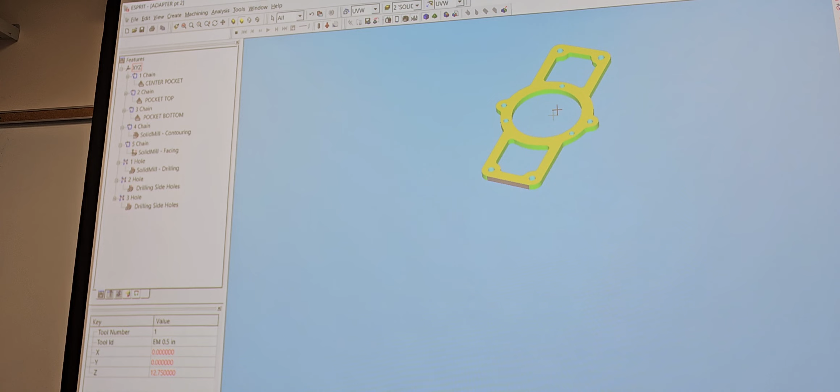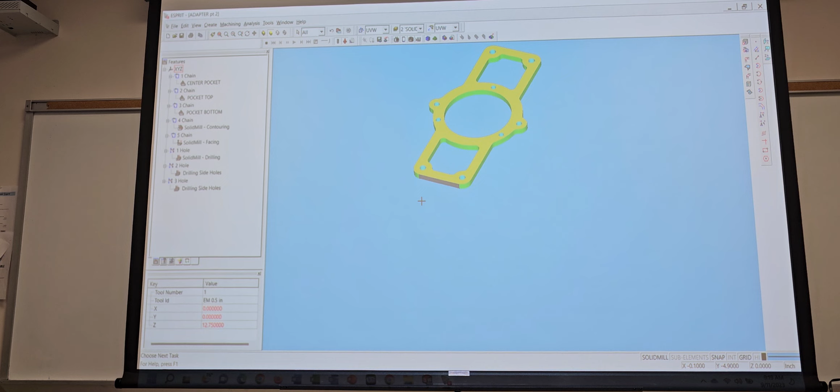Size, it might be over at least 10 or 20 thousandths, right? We gotta clean that face up, because a surface that hasn't been machined is not a complete part, right? Because if you have a saw cut here and it's lower, and over here it's higher, and your overall length from here to here is higher, and here to here is lower, well, we got a problem, right? So we have to make sure that it actually goes to that tool path.

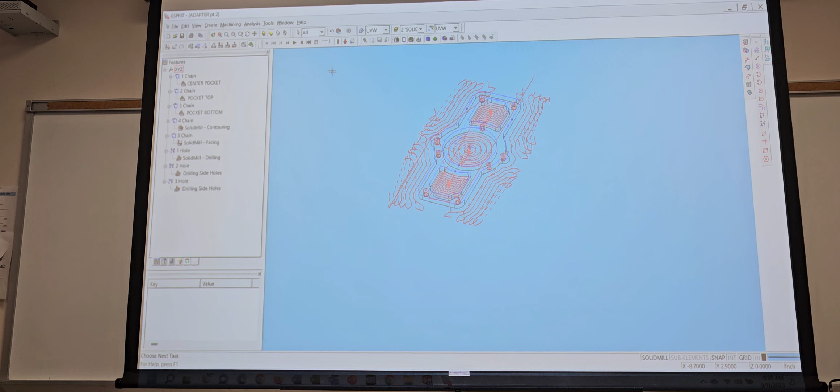And I know a few of you guys had this issue over the weekend. So, like we said, we gotta go to our solid, our material, right? So the material is, wait, first of all, where are your lines at? Which one? The X and Y. Your center ones, yeah, your axes. So we have our center there, but where are the actual lines? Oh, I forgot how to put that on there. Where is it?

Oh well. But we know from here down here, it's half of whatever this overall length is, right? So the overall length, according to the print, is 7.26, right? We got the number right there. So we're gonna go back to our stock, and let's say we make it 7.5. So we gotta come to our starting Y and our negative. So I'm gonna just go to my calculator, 7.5 divided by 2.

It's Monday, so I don't want to do math.

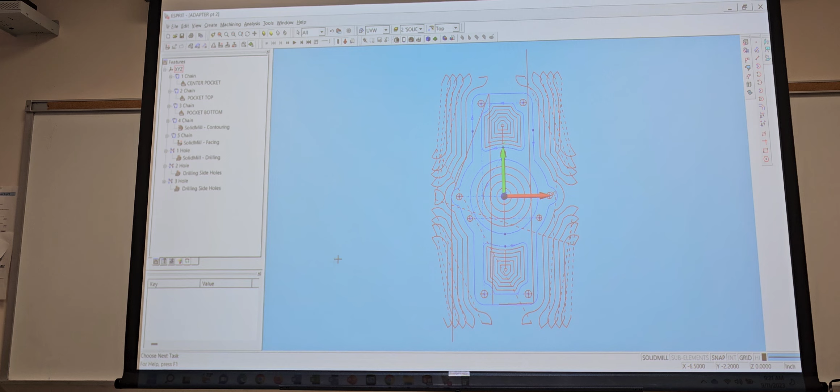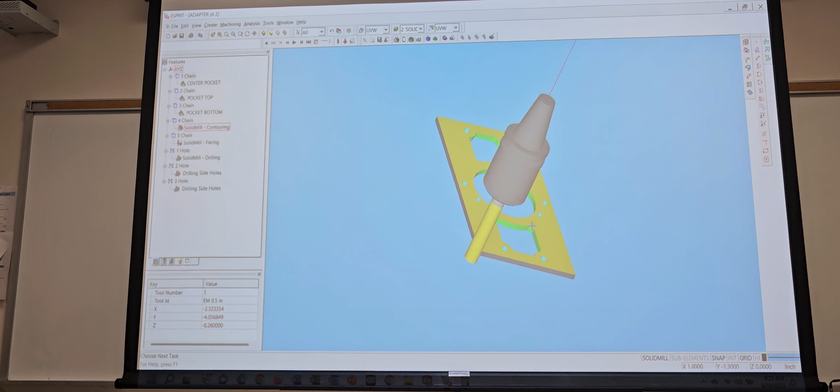3.75, right? So now this is going to go down to negative 3.75. We're going to hit update, hit OK. Now, just like on Bill's, it didn't register it at first, right? So what I told him was we can make a contouring just as a finish on the outside, and then make a rougher, and then make a finisher. As soon as we did that, the computer registered it and said, oh yeah, we are missing that. Now it's hitting it more, but it's not facing it the whole way, right?

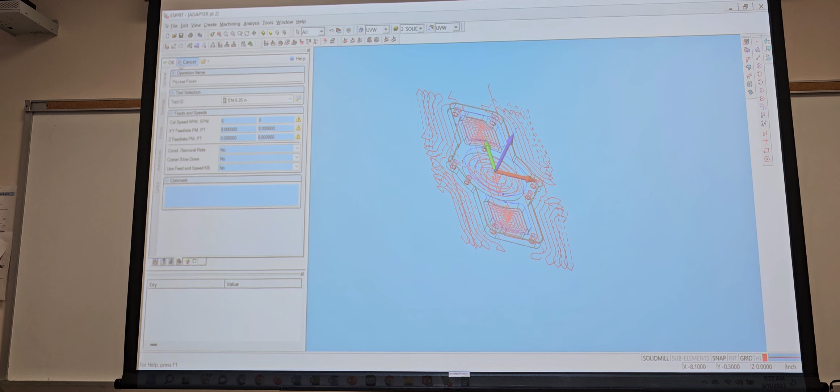I guess the only other way would be to do a new profile chain, right? You could do that too. Yeah, you could do that also, but let's say this one, we went to the contouring, and you see how it's thinking and generating? So we just made it a finish pass, and we said no stock allowance. And we hit okay. I don't have a tool. Let's just say 0.25 inch. Now you guys see how it's making that? What are those lines? This is entry, exit.

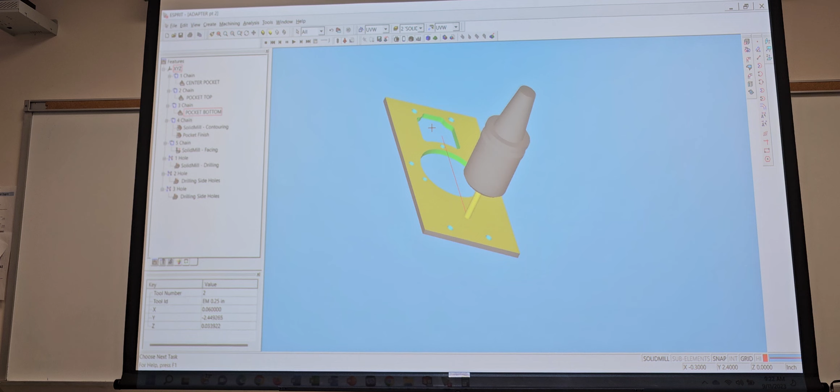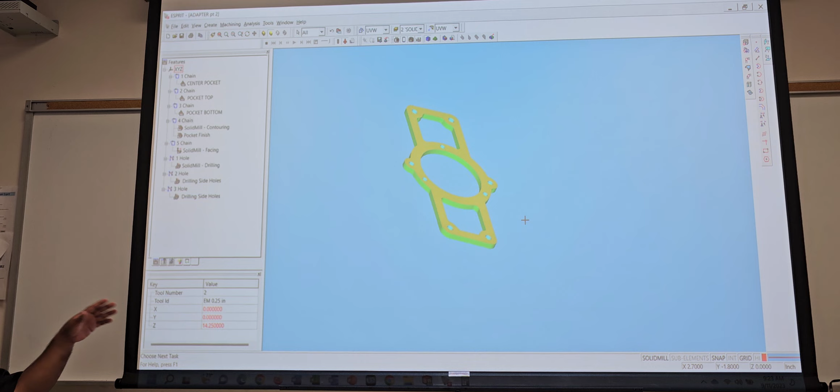Very nice. Ta-da. Now we clean it up, right? So there's multiple ways of doing it, guys, but normally when you're machining this in real life, you want a rougher, especially if that tolerance is going to be really tight. If this tolerance from here to here is 7.260, let's say plus 5 minus 0, you want to rough it out first, right?

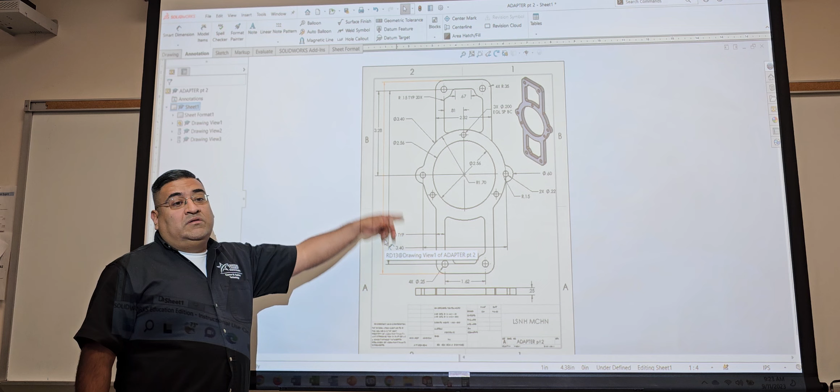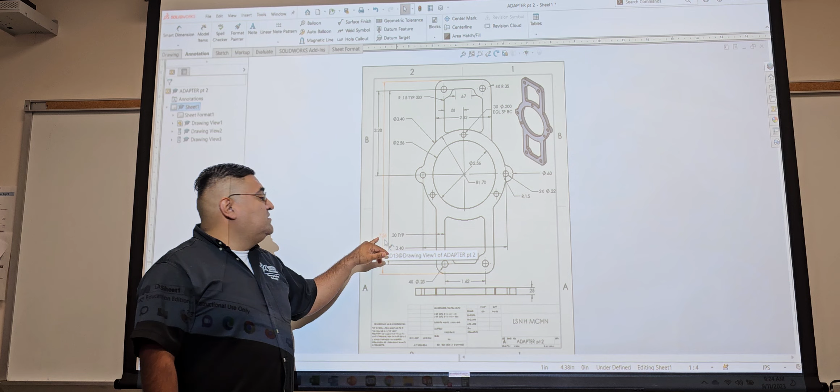Then you want to measure it. Then you don't want to run your rougher again. Why are you going to run the whole rougher again with the stock material there? You can easily create, with the same chain, a contouring that does just one pass. So with that one pass, that's how you control that 7.26. Does that make sense?

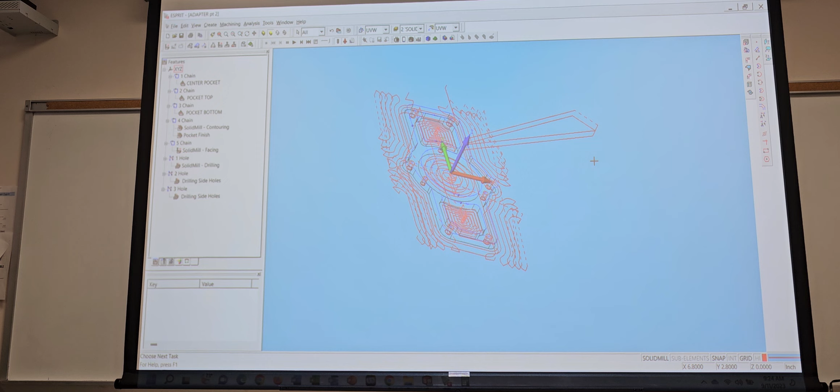Also, in terms of the chain, what I did was I just selected those outside lines and then made the chain off of that. Is that how you normally do it? There's a few ways of doing it, right? But let's say I wanted to select just these chains above. The easiest way that I found was F11. I'm gonna create my chains, and I'm gonna create my toolpath, because obviously somebody was too lazy to do it. I did it on the other one, I can show you those.

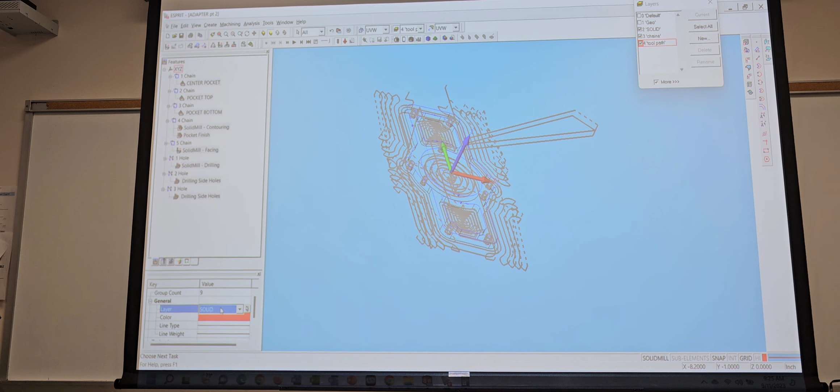So I'm gonna hit chain. I'm gonna select all my chains. And you're just holding control. Yeah, I'm just holding control, going down to general. Instead of this being solid, I'm gonna hit chains, boom. All of my toolpath, I'm just gonna select all of it. That way we make this a whole lot easier for ourselves. Select this. There goes my toolpath. So when I select that one and that one, boom, everything else goes away, right?

So let's say that I imported my drawing, I smashed it, and I got my geometry. So all this should be under Geo, but it's not, because Geo's not highlighted. All this should be under Geo, but it's under solid, right? So there goes Geo, boom, it goes away. So now my solid isn't even there anymore. Where'd you put the solid at?

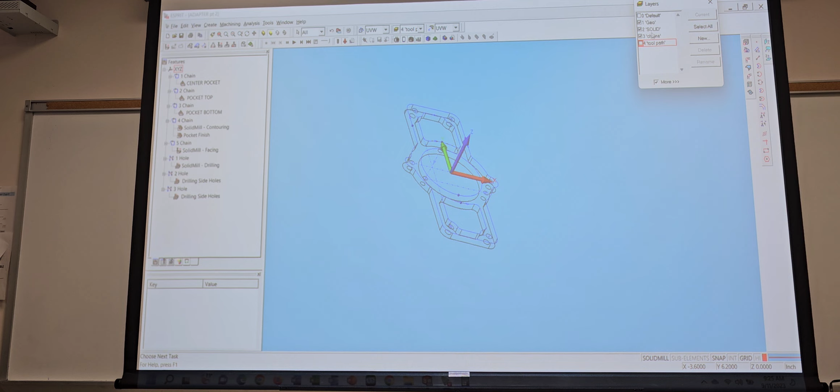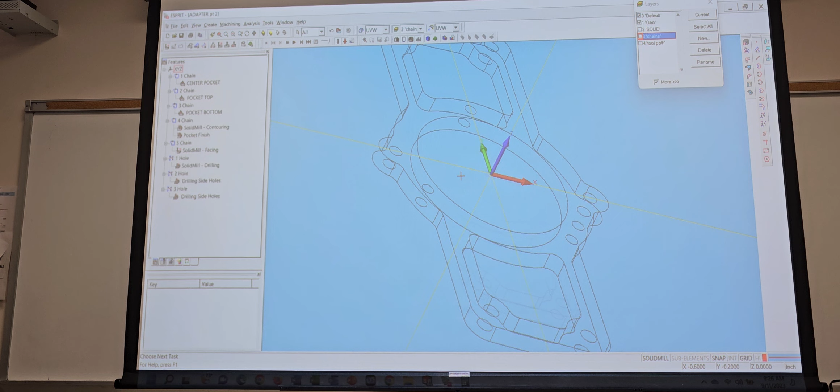Here on default. There you go. So I'm gonna scroll here, click that one, and then put that one under my solid. Alright? So now I'm gonna take off my solid also. So now I only have this. Let's say that I just wanna select the top outside line. That's pretty much what it is. Yeah. Quickest, fastest way. See, I have my lines now. I have my lines up here.

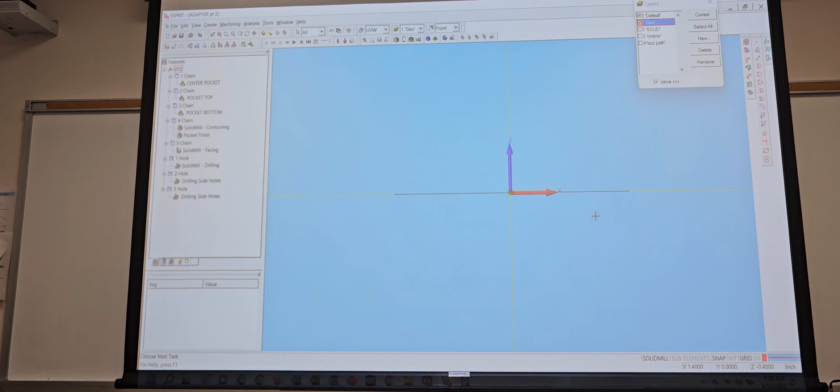Okay. So I would come over here, go to my front view. Now from here, because it's still on chains, I would just make a box right here. See how all those got highlighted? Delete. Now, if I just want the outside one to make that profile, hit shift, click on it, create the chain. It's a lot easier than just hitting control and then going around clicking. Click. And then you miss one that throws it off and you gotta start all over again.

Little shortcuts. Shift, guys, or control. Yeah, little shortcuts, right? Shift it, baby. Shift. Will make your life a whole lot easier.

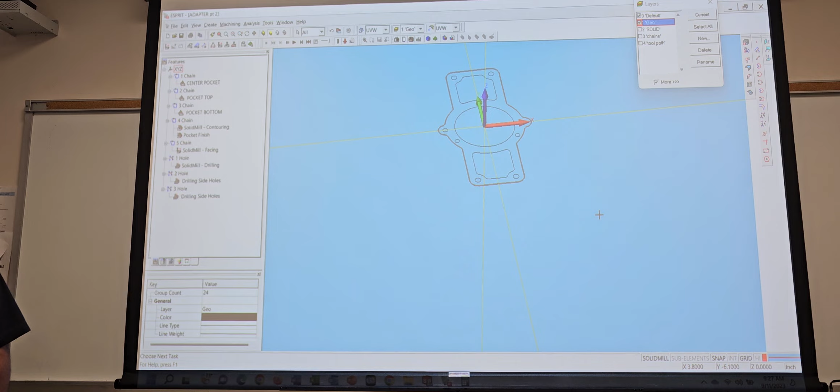Correct? All of you guys saw the gear and the sprocket the first time, how we were having such a difficult time with it. Y'all looked at that and y'all were like, man, this is really hard to do. Now you guys do it in what? Not even 5 minutes, right? Because you guys know the little tricks to do it. This is why when they ask for a programmer, they say, hey, how many years have you been programming? If you just say, I just got out of school, they know they're going to be a little bit more lenient with you because you haven't learned all these little tricks yet on your own, right?

Now, if you say, hey, man, I got 5 years of experience, okay. I need you to make me this part. You got 30 minutes to give me the program. Cool. If all I got to do is make the program, too easy in 30 minutes, but don't ask me to go out there, set up my tools, and touch off and everything like that, too, within 30 minutes. It's going to take me a little bit longer.

In a real shop, you go look for a drill that's 5 inches long, you might be looking for that drill for an hour and a half because somebody else has it on the machine. Or it's in a toolbox that somebody was hiding and didn't want anybody else to know, right? Those are real life measures, right? How many times in the motor pool do they ask you for a torque wrench and it takes you hours just to find that torque wrench, right?

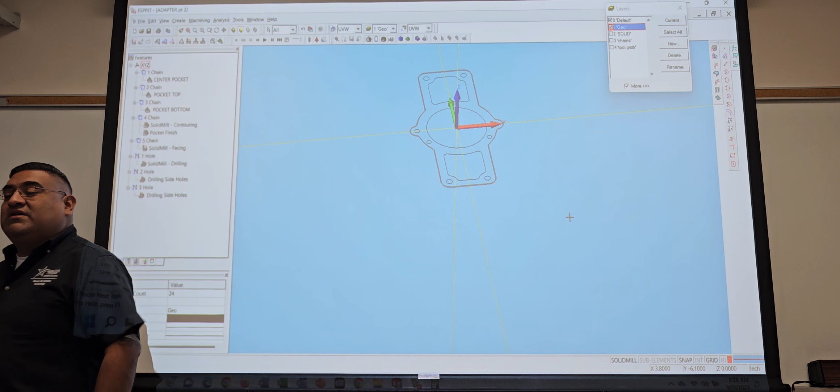So, but if it's just a program, if it's just, hey, here goes the model, input it, write me that program. Shouldn't take you more than an hour to do. 30 minutes if you're good. That easy. Alright? So that's the way we gotta start thinking, guys.

I mean, and on your test here on Thursday, if some of you guys do it and you're out of here by 30 minutes, and you tell Cornelius, hey, I'm done. Really? The test is 4 hours and you're done? Yeah, I emailed it to him. I feel good about it. We're done. Now, don't email me a few hours later saying, hey, I messed up on something. I'm going to resend it now.

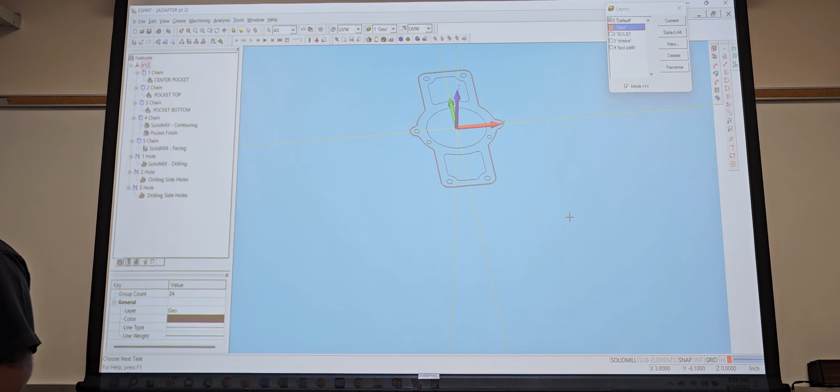No, take your time on your test, guys. You get 4 hours now to do it. In Cornelius' class, you had what, 2 hours, right? So you actually get 4 hours now to do it. Make sure you take your time on your test. You double check it.

Guys, all I want is for me to push, oh wait, y'all need to cut it? Just do it. Yeah, SolidWorks. Y'all just doing the drawing and importing and making sure it's up. Now, if you want extra bonus points and cut it, go ahead and do that too. Extra. Because I'm telling you, some of you guys are gonna make that drawing and y'all gonna be done.

I can make that drawing in 5 minutes for your test, and import it in ESPRIT, everything done within 10 minutes. Literally walk in here, look at the print, bam, bam, bam, bam, 10 minutes. For a 4-hour class, I'll be done in 10. So, like I'm saying, guys, make sure you double check everything. If you have to start all over, start all over. Make sure you save your progress, especially on these computers, right?

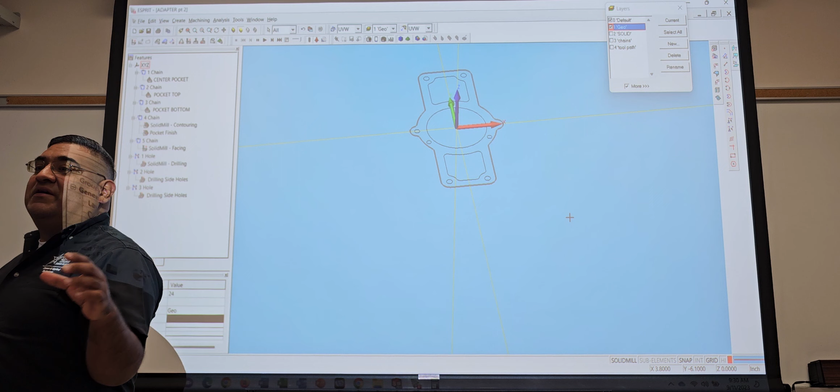On your laptops also. How many times have y'all been working and up there to the top left where it says ESPRIT, it says not responding. Well, I'm right here, respond to me. I mean, how many times? And especially if you do so much work, that's a lot. Happening to our class quite a bit. On that part, kept doing it too. That's why I always, after I do like the first few lines, save as, and then just keep hitting that. You want to keep on hitting save.

All right, Antonio, you got something?